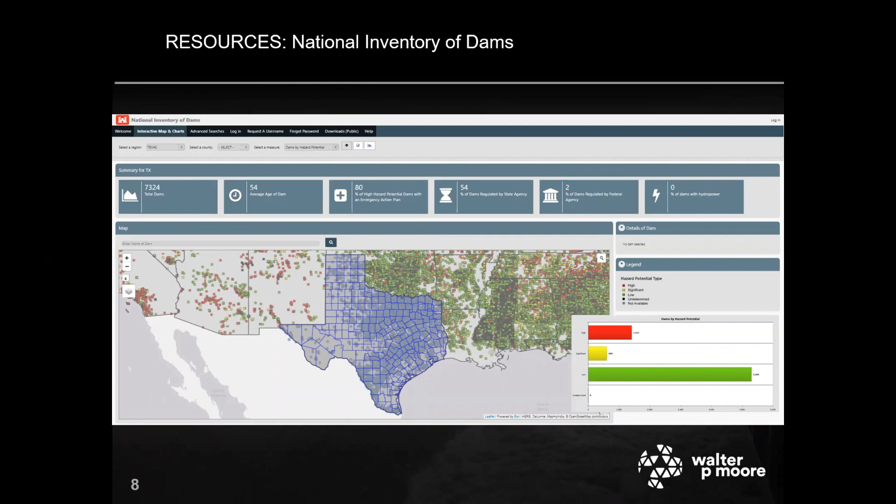Excuse me just a second. All right, sorry about that.

Let's look a little bit at the rating of the national infrastructure. This course that we started back in 2002, the 2-day course, was a result of ASCE's request for some seminars on failing infrastructure across the United States. One of the things that I have done over the years is to keep track of the ASCE report card since 1988.

So what you can see here are all the various different categories that we have for the national infrastructure, and the grades that have been given over the years for each category. As you can see, dams throughout the years have pretty much maintained a D average, which isn't good. So it became a concern for our staff here at Walter P. Moore to try and get that message out.

And so we got involved in providing these seminars across the United States to try and get engineers and perhaps, if we could, their clients, and then there were some people in the insurance industry to understand what the risks were related to dams.

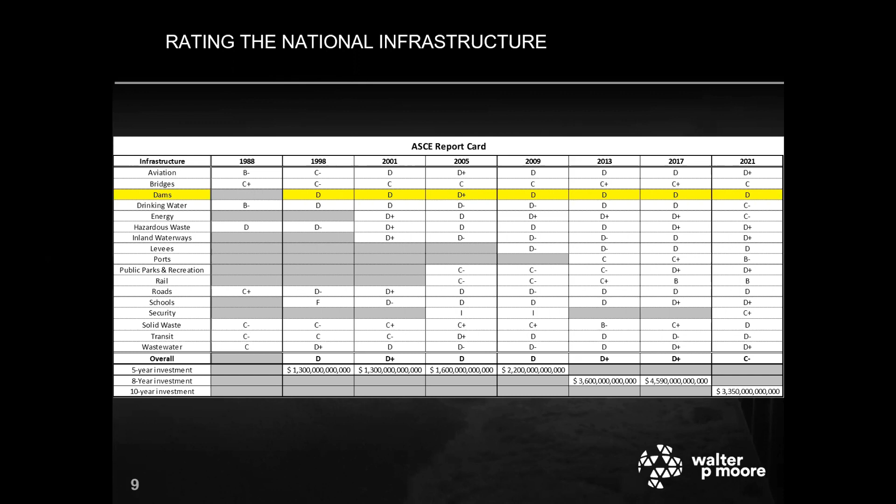So there are several issues that face dams. According to the Association of State Dam Safety Officials, the top issues facing the dam safety community are, first of all, the risk of failure. There are currently over 1,680 dams across the United States which are considered unsafe due to some significant deficiency, and these are located in nearly every state.

Next, there is the increasing hazard. A high hazard dam indicates that there would likely be loss of life or substantial damage to property in the downstream reaches in the event of a failure. There are currently over 15,000 high hazard dams in the United States, which is up from 9,900 in 2006.

The increasing number of high hazard dams is not due to an increase in the number of high hazard dams being built, but rather has to do with the increasing development downstream of existing dams. Texas and North Carolina, just those two states, account for over 1/6 of all the nation's high hazard dams.

I'm going to talk a little bit, just mention briefly the financing for maintenance, upgrade, and repair. 63% of all dams in the US are privately owned. So if you think about that, that's probably dams owned by farmers or by homeowners associations, and the financial resources of these private owners are somewhat limited for most of those dams.

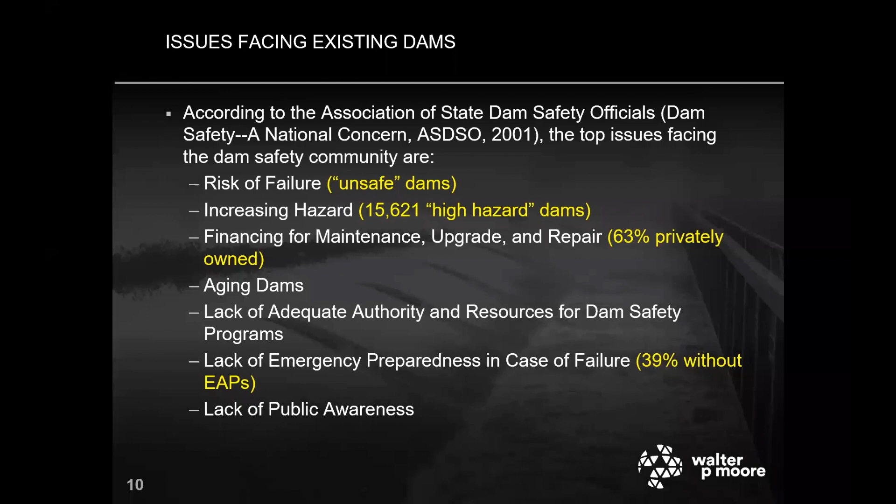So turning back a little bit just to the two categories that I skipped over, aging dams, just to give you an idea. As of 2018, some of the statistics were that many of the dams designed have an effective design life of about 50 years.

So I should say this NID statistic's been upgraded to 2020, but it's estimated that as of 2020, approximately 63% of all dams in the US were older than 50 years already. And by 2030, that number is going to jump to 81%.

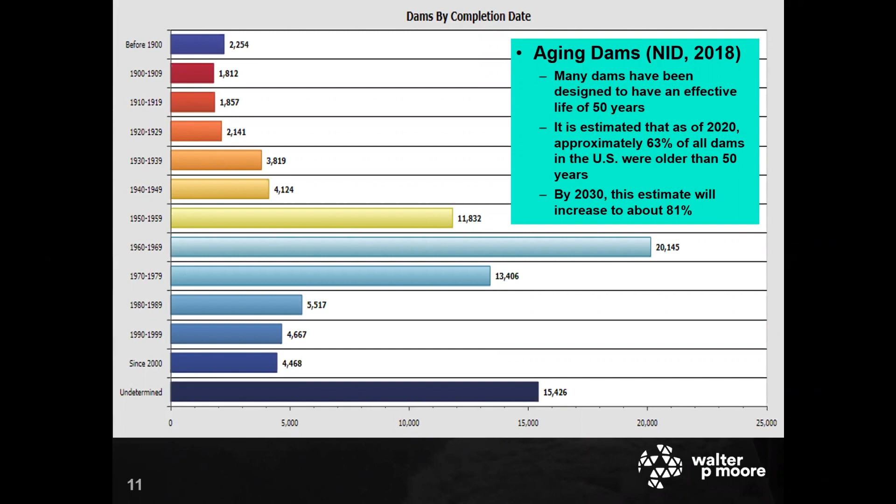And then finally, on that list of issues, if we look at the lack of adequate authority and resources, I'll just take Texas as an example. We see that we have over 7,000 dams in the state, of which 4,000 or so are regulated by TCEQ. There's 1,400 high hazard dams, and approximately 800 of those are deficient in some form or other.

The good news is that we're higher than the national average in terms of those high hazard dams that have an EAP, or emergency action plan, at 80%.

But what we find is that most states have legislative authority to carry out a dam safety program, but some states have limited ability to enforce the law, and officials have no recourse if a dam owner fails to respond to state-ordered repairs. On top of that, all but one state, that state being California, are underfunded and understaffed to administer a state's dam safety program effectively.

You can see here in Texas that we have a budget of roughly $417 per dam in the state, and that's just the ones that are regulated. We also have a number of dams that each full-time equivalent staff at TCEQ has responsibility for, which averages out to about 149. FEMA recommends that number come down to about 25 per full-time employee.

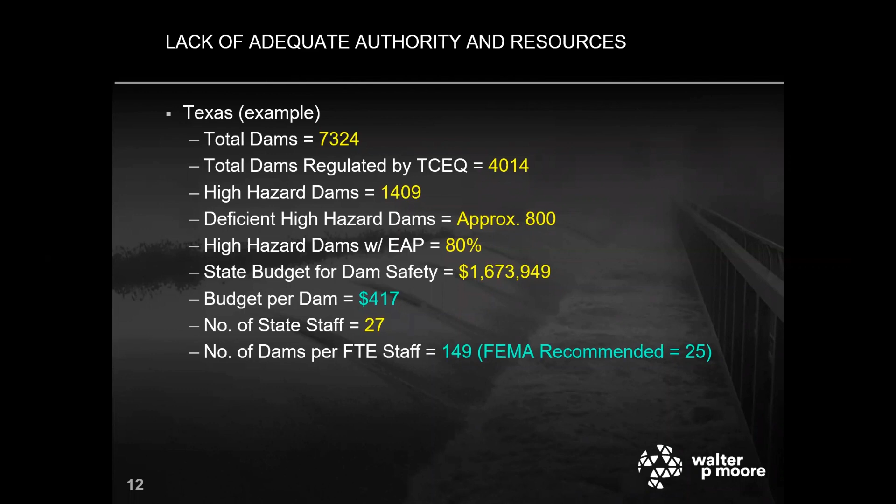One state, Alabama, has no budget for dam safety whatsoever. And so that gives you sort of the background of where we are in terms of that report card and the statistics that are following.

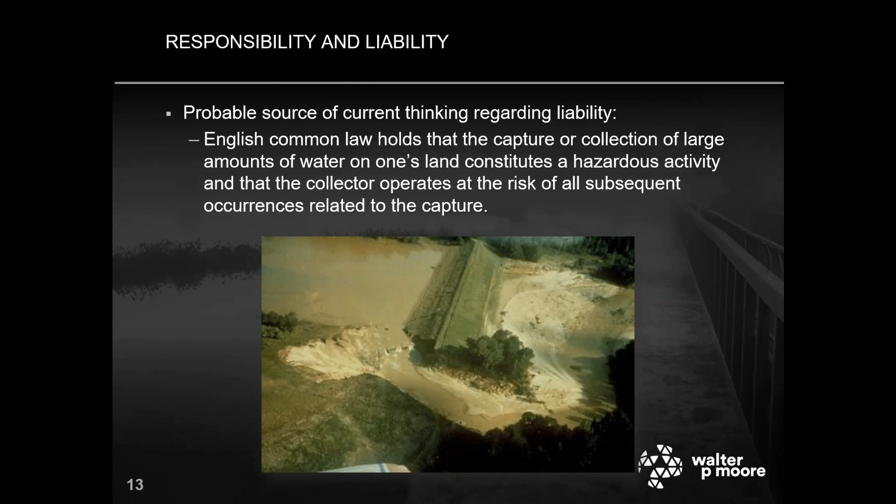So let's turn our eyes to responsibility and liability. The probable source of current thinking regarding the liability for dam safety is English common law, which holds that the capture or collection of large amounts of water on one's land constitutes a hazardous activity, and that the collector operates at the risk of all subsequent occurrences related to the capture.

This may come as a shock to some dam owners, such as homeowners associations, who probably inherit an amenity lake from a developer. While proper operation and maintenance may be only one aspect of the owner's activities, safely maintaining a dam is a key element in prevention of a failure and limiting the liability of the owner.

So when assessing liability, should a dam failure or an incident occur, the standard of care exercised by the owner is going to be closely examined. So ultimately, the responsibility for maintaining a safe dam rests with the owner.

I put this in here just because I think it reads really strangely. The National Dam Safety Program Act of 1996 reads: nothing in this act, or no action or failure to act under this act, shall create any liability in the United States or its officers or employees for the recovery of damages caused by such action or failure to act. And secondly, relieve an owner or operator of a dam of the legal responsibilities, legal duties, obligations, and liabilities incident to the ownership or operation of the dam.

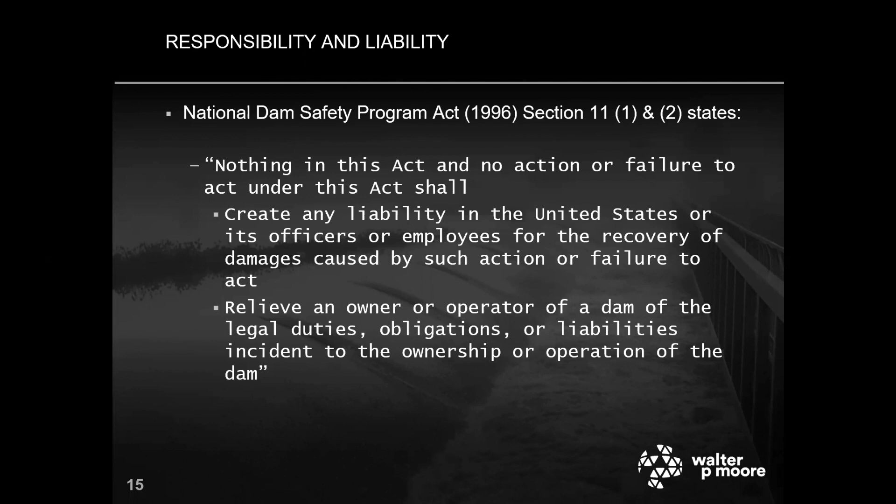So what is this saying? The federal government is basically saying that we're not responsible. So again, they're reinforcing this idea that the liability and responsibility comes back to the dam owner.

Well, is dam insurance something that an owner could acquire? Dam insurance is available for dams owned by state and local governments, and that is insured using the financial resources of the government itself. It's also available to privately owned dams.

Available for privately owned dams used for revenue generation, such as those for hydroelectric power. Owners and operators have resources to pay for insurance through revenue generation activities, but they also have an incentive to maintain coverage to protect their investment and to minimize business disruption losses.

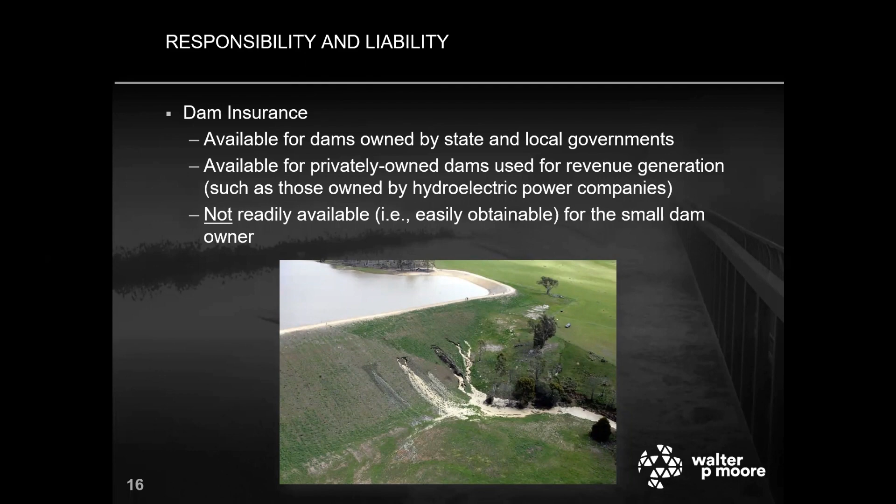But insurance is not available or readily attainable for the small dam owner. The primary barrier is the lack of credible probability assessments to determine the risk of loss. So insurers are reluctant to cover risks that cannot be assessed with a reasonable degree of predictability, and this leads insurers to base premiums on worst case scenarios, making insurance not affordable for the small dam owner.

So if you look at 1963 to 1972, there were several dam failures across the U.S., including the Baldwin Hills Dam in California and the Buffalo Creek Tailings Dam in West Virginia.

Then you have the executive order in 1979 that was preceded by 1976 and 1977, when there were several other very well-known failures, including the Teton Dam in Idaho and the Kelly Barnes Dam in Georgia. Then in 1994, we had 84 dams failing in Georgia, southwest Georgia, due to Tropical Storm Alberto. And then in 1996, we have the National Dam Safety Act. And then finally in 2001, we had 9/11, which resulted in the Dam Safety and Security Act.

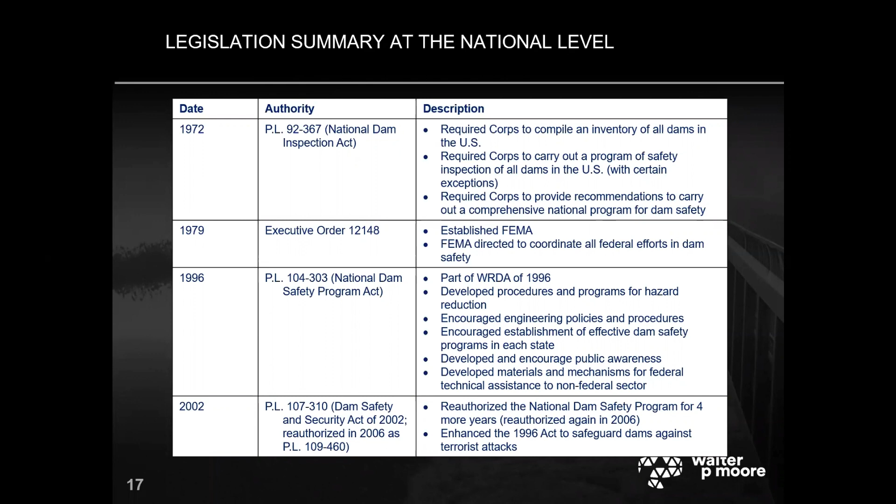Now, each one of those established different governing authorities with respect to dam safety. So we've got the implementation of a dam inspection requirement for the Corps of Engineers, and then the development of the inventory that we saw earlier. We have FEMA that is now coordinating federal efforts for dam safety. We've got the development of policies and procedures related to dams, and then finally enhancing the 1996 Act to safeguard against terrorist acts.

Now, in talking about regulations, dam safety regulations in Texas are governed by the Texas Administrative Code, Title 30, Part 1, Chapter 299. Now, these regulations will vary from state to state, and some of those acts that we looked at on the previous slide dictated that the state is responsible for setting up dam safety programs. And so while regulations are not the same from state to state, because there is no national regulation, FEMA's providing training, resources, and guidance. What you will see is there's some very similar aspects to all of the regulations from state to state.

And so Texas has its own, it's in Chapter 299. That's where you find really all of the details about the dam safety program there. The TCEQ also maintains an inventory of all dams in Texas that are currently under their jurisdiction. We noted earlier that there are 7,300 dams or so in Texas, but only 4,000 that fall under TCEQ regulations.

In 2011, legislation was enacted by the state that exempted a significant number of dams from TCEQ regulations. Basically, reservoirs that impound less than 500 acre feet and that are classified as a low or significant hazard, that are located in a county where there's less than 350,000 people, and they're located outside of the city limits of a municipality, are now exempt. So you meet those criteria, you're exempt.

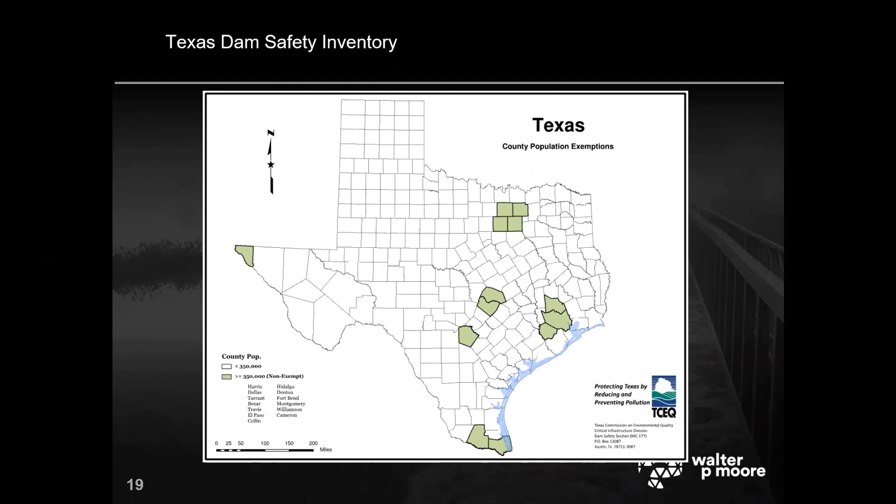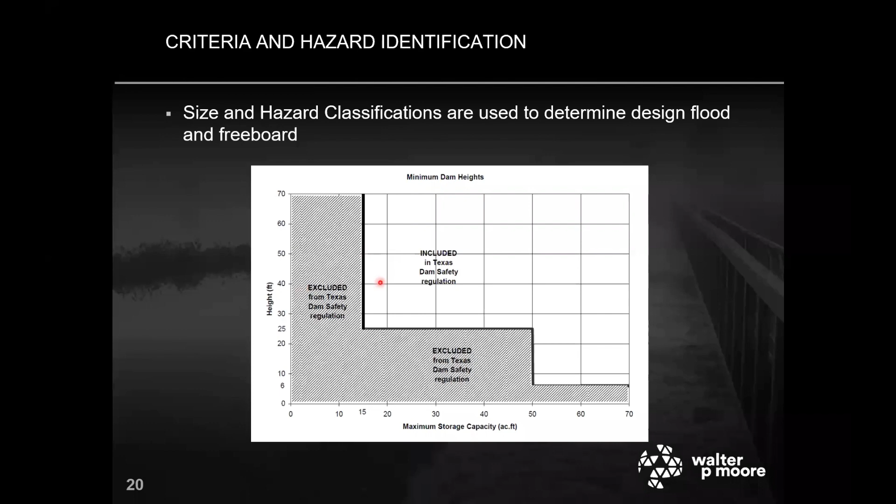There is criteria and hazard identification guidelines for the state of Texas, and all the states generally have this, perhaps with the exception of the one notable exception that I made earlier, where the state does not have any dam safety criteria. But criteria is based on size and hazard classification. These are used to determine the design flood and, in some cases, freeboard, depending on which state you're in. I should also say it identifies, you can see this gray hatched area - these are dams of this size which are excluded from Texas dam safety regulations. So this chart is really helpful in determining where we fall in terms of the regulations.

Now, if we talk about the classifications of dams, it falls under size classifications and hazard classifications. So typically in Texas, a large dam is considered one that is either greater than 50,000 acre feet of impoundment or greater than 100 feet in height. A small dam is less than 1,000 acre feet in storage, and less than 40 feet in height. And then an intermediate dam would be all those dams that are in between.

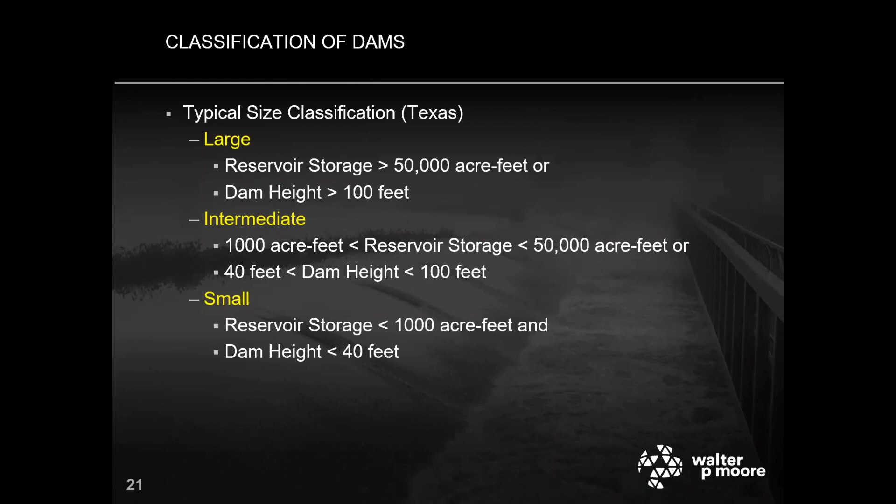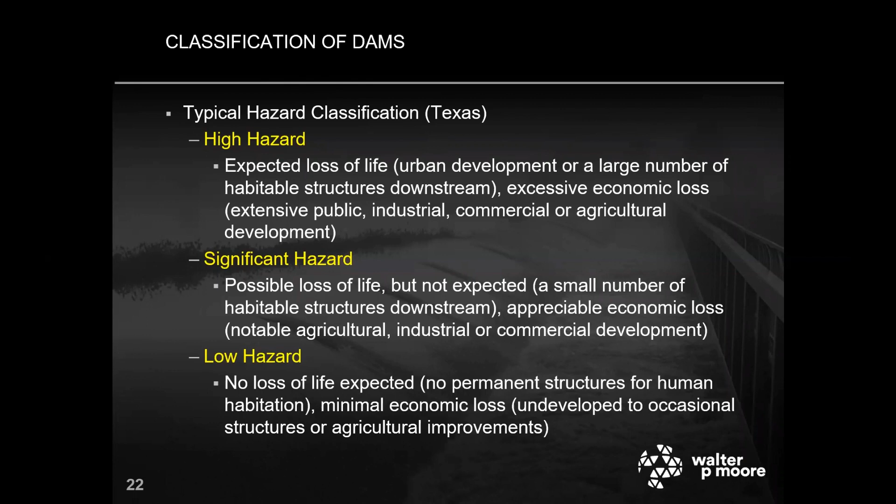Hazard classification - most people, when they hear high hazard dam, think that a dam is about to fail. That's not really what we're saying. What we're saying is if it were to fail, there would be expected loss of life and excessive economic loss. A significant hazard would really shift the gears to a possible loss of life, but not expected, and an appreciable economic loss. And then a low hazard means no loss of life expected and minimal economic losses. Sometimes the loss may only be the dam itself.

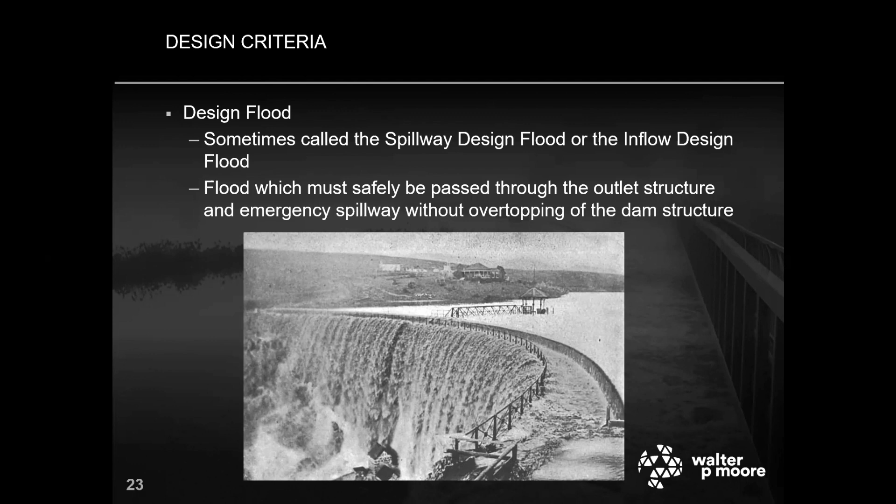These two factors figure into calculating what the design flood is going to be. The design flood, sometimes called the spillway design flood or the inflow design flood, is the flood which must be safely passed through the outlet structure and emergency spillway without overtopping the dam structure itself. In Texas, we have a table that sets apart the hazard classification and size classification so you can read off and determine the minimum design flood you'll have to pass.

There are a few exemptions. If you can show no adverse impact to downstream areas through a breach analysis, you may be able to pass a smaller storm. But more than likely, your spillway will have to be designed for one of these flood events. So if I had a significant hazard dam that was, say, 25 feet in height, which would be a small dam, I would have to pass 50% of the PMF, or the probable maximum flood.

Well, what is the probable maximum flood? That's the flood caused by a rainfall produced, in layman's terms, by the worst possible combination of climatic events. It works out to be about a rainfall event of 50 inches in 72 hours in the DFW area.

It's higher in the Houston area. Just to give you a relative understanding, Harvey reached about 95% of the associated probable maximum precipitation in the Clear Lake area. Beaumont was above 100%. So if you thought we can't reach 100% or a full probable maximum precipitation or probable maximum flood, we actually can. It looks like if Beaumont exceeded 100%, we might have to revisit those statistics in the near future.

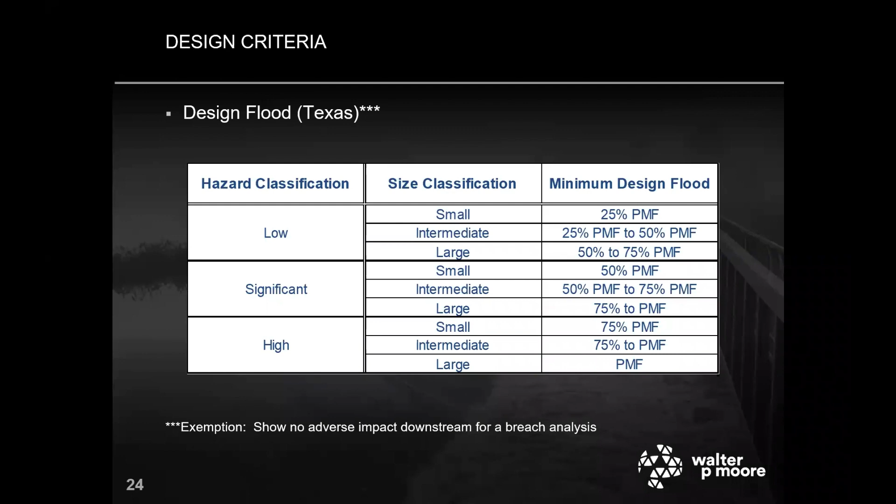But these are the magnitudes of events we're looking at. If you're trying to get a ballpark estimate, a PMF flood, a probable maximum flood, is roughly about 5 times a 100-year flood event. That'll give you a sort of a range of what we're talking about here.

I want to walk you through a real quick exercise that I normally do with my class. Looking at the statistics I have here on my slide, the description of the dam, I find I've got a 19-foot dam that can impound at its maximum elevation 939 acre feet. Because there's a county road bridge and a barn within 1 mile, it's probably classified as a small dam. It's in a rural area, so it would be a small dam with a low hazard classification.

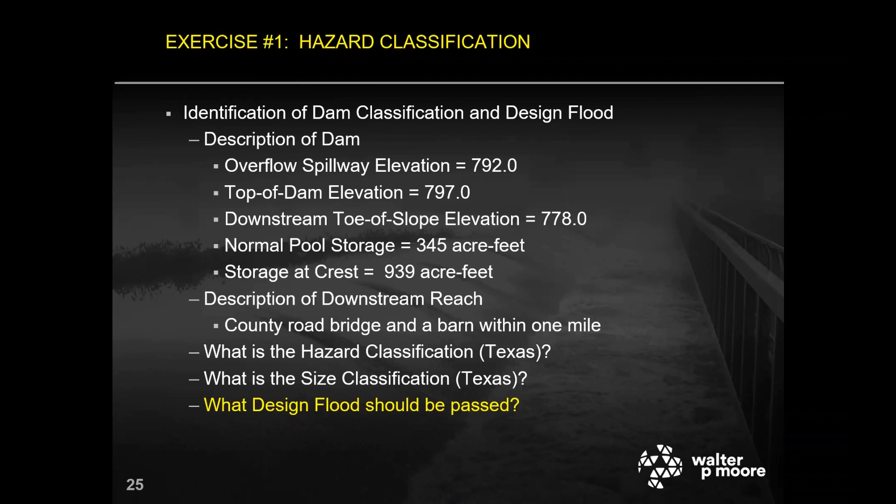Based on that table I showed you, that would turn out to be about a 25% probable maximum flood. Now here's the issue: a developer comes in and subdivides a 100-acre tract located downstream into 5-acre lots. 7 of these have a serene view overlooking a small stream, and the houses to be built are located at the outside edge of the regulatory 100-year floodplain, which has been significantly reduced as a result of the dam.

So the question becomes, what changes do I have to account for in terms of hazard classification, size classification, and the design flood I'm going to have to pass? If we look at it, the dam doesn't really change, so it's still classified as a small dam.

But what has happened is that the downstream condition has changed, and we have substantial residential areas that are now at risk, creating a high hazard classification. So that turns into going from a 25% probable maximum flood to 75% probable maximum flood. Now we've got 3 times as much flow that we're going to have to pass through our spillway. In a lot of cases, that can't happen.

So what do we do if the design flood can't be passed? The first thing we look at is the retrofit of the dam and spillway to make sure it can pass that. There is an alternative, an exemption I mentioned earlier, that you can perform a breach analysis to demonstrate there are no adverse impacts in order to qualify for an exemption. But that doesn't always happen, and so you're left with the idea that you may have to retrofit the dam and spillway, and in some cases, it may be more beneficial just to remove the dam altogether.

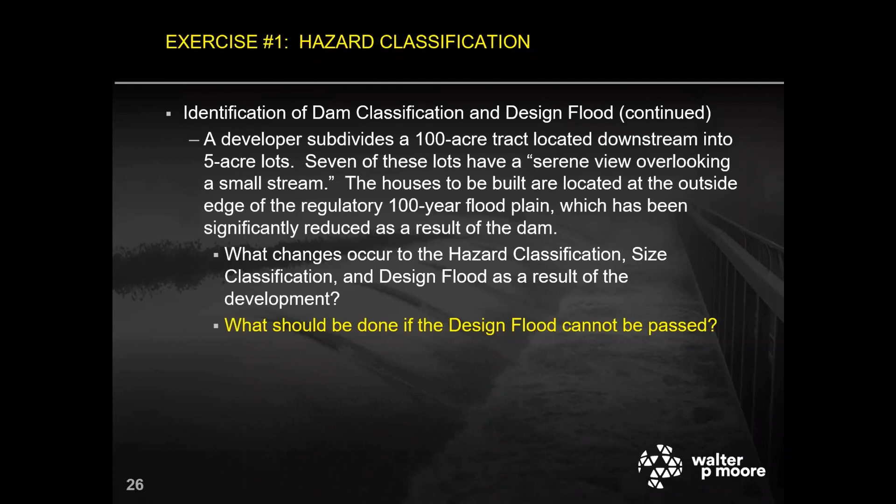With that background, let's talk about the issues we see out at dams when we do inspections, looking for deficiencies in the dam, looking for issues that may need to be maintained at a higher level so we don't lose the dam in the near future.

I'm going to walk through several inspection issues and how we might do an inspection. I've got several pictures for this exercise, because I think the best way to tell the story is with pictures. The things we're looking for are structural inspection issues, which deal with the integrity of the dam itself; geotechnical issues, which are primarily foundational and seepage issues; and finally the outlet works, which focus on the operational issues of the dam, both at low flow and at high flow conditions.

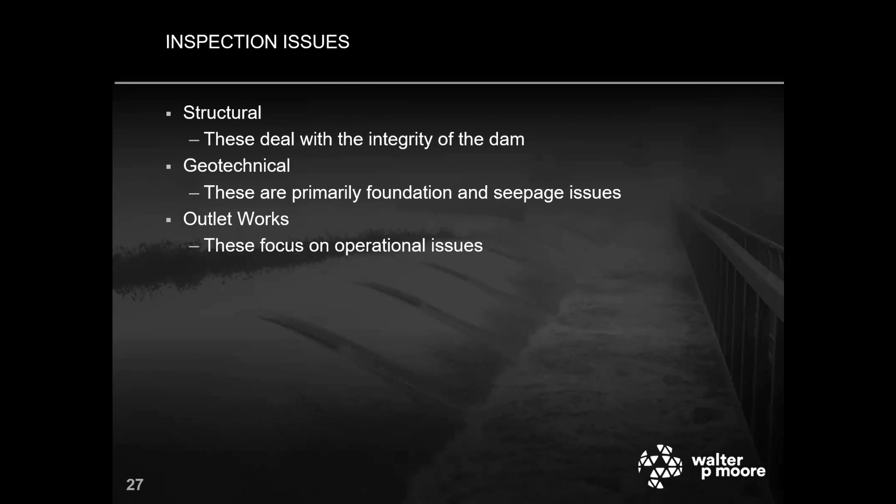So where do we begin? Part of the inspection process involves looking at records from previous inspections, or even just looking at where the dam is located and the condition of the surroundings it sits in. A lot of that can be done from a desktop, but we really have to get out there and walk the dam to figure out where the hidden issues are that we can't really see.

So the first thing we're going to want to do is walk the crest of the dam and look for things we might see out there. Are there longitudinal cracks in the dam? Are there transverse cracks due to erosion that could now allow water to pass over the top of the dam before it actually reaches the top? Are there depressions in the top of the dam? Things like that.

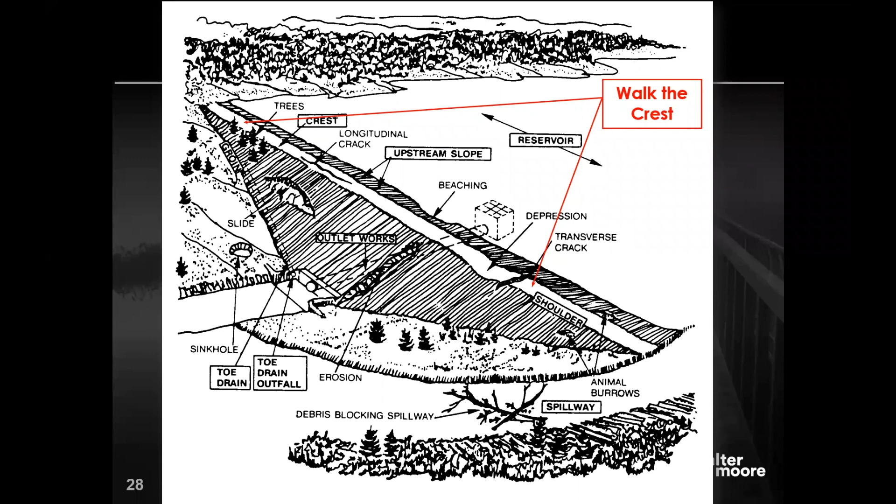If the dam is moving, that's something of consideration. Either way, we'd want to document this and provide it as a record of what may be happening. You may want to keep this under observation over the next couple of months and years, just to make sure it's not progressing further.

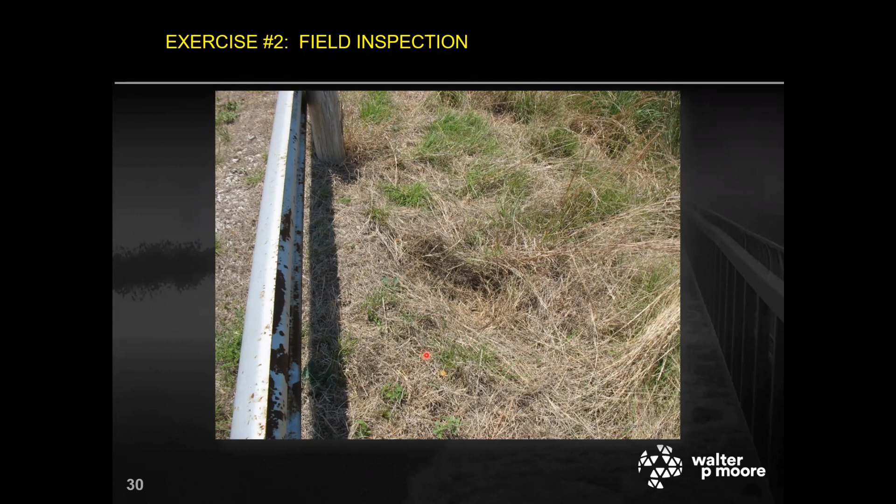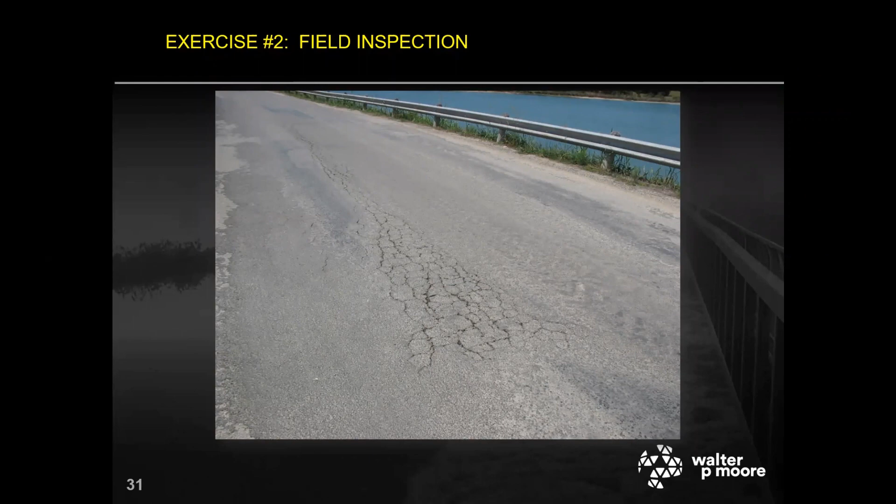These are all things that we would note as we're out there doing the inspection.

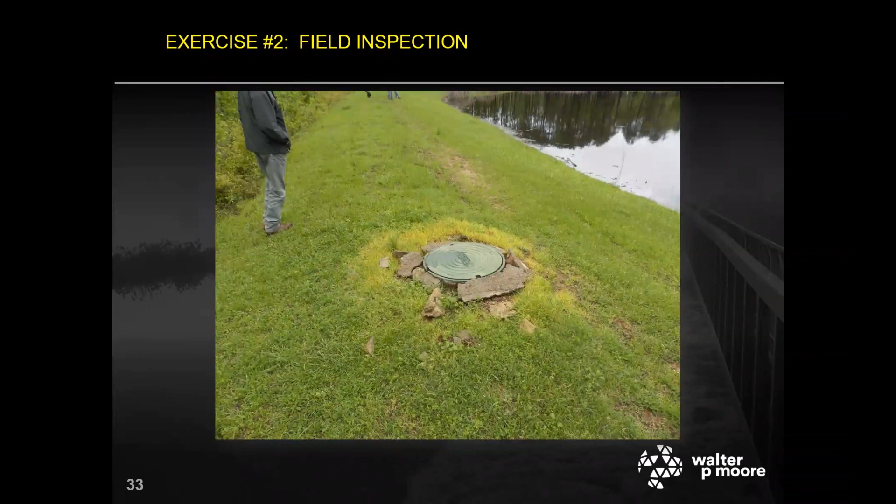This was kind of an interesting dam. We found a sanitary sewer running longitudinally along the dam axis, probably not the best place for utilities or sewer systems. It was running this direction all the way through the dam and across the spillway, a little bit downstream of the crest. So things to note that could potentially be risks to internal erosion, piping, or some sort of incident that could occur.

Next, as we continue the inspection, we want to look at the slopes and the toe of the dam. Some of the things that can occur include heavy vegetation, which can hinder the view of what's going on — maybe you have a slide or a slough in another place. So we want to pay close attention, walking back and forth across the slope of the dam to determine if there are any deficiencies there.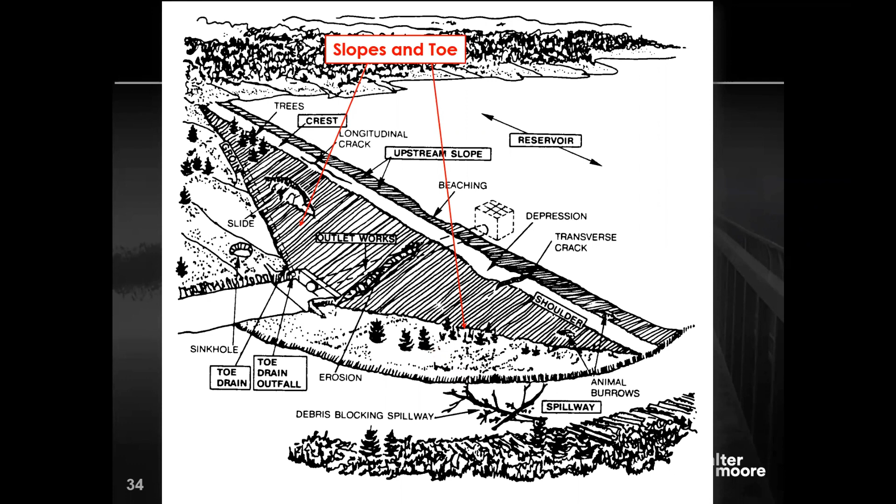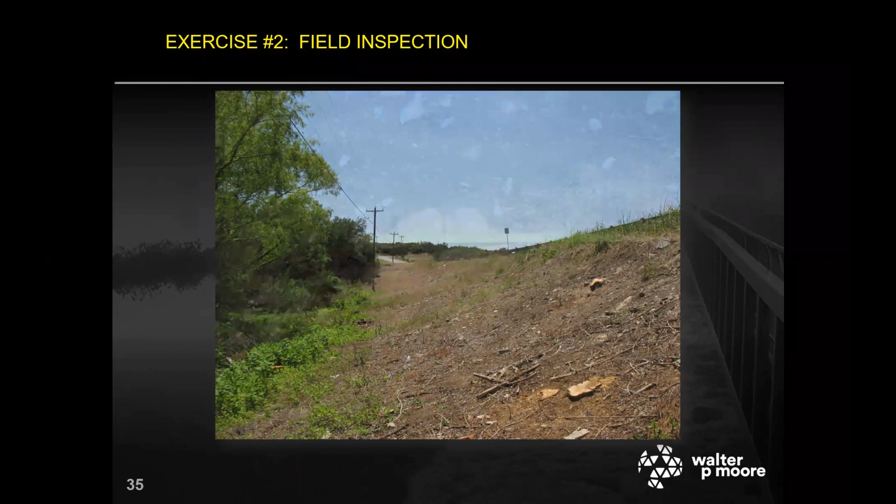This is that same dam with the road going across it. There is no vegetation on the downstream side of the dam, which is where we are. TCEQ had recommended the removal of trees from the dam, but what we see is the potential for erosion because there's absolutely no vegetation there now. When TCEQ made that request to remove all the trees, these were all juniper trees, and they were cut off at the base, so the stumps were left behind. This is usually not a good idea — tree roots are going to rot, creating the potential for piping along vacated tunnels in the dam. TCEQ did indicate that junipers won't rot that quickly, but there is a need for a long-term fix on this dam. So we recommended removal of the root balls and backfilling with good material. We got some information from the state of New Mexico on how best to treat this sort of situation.

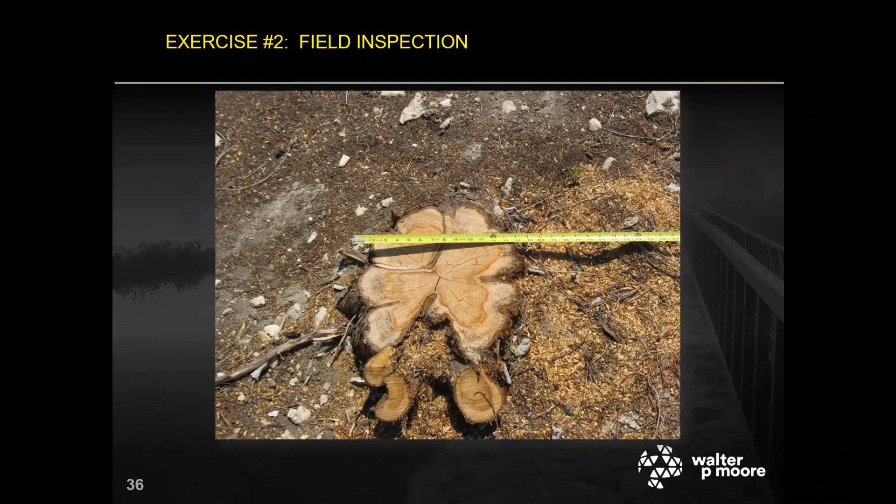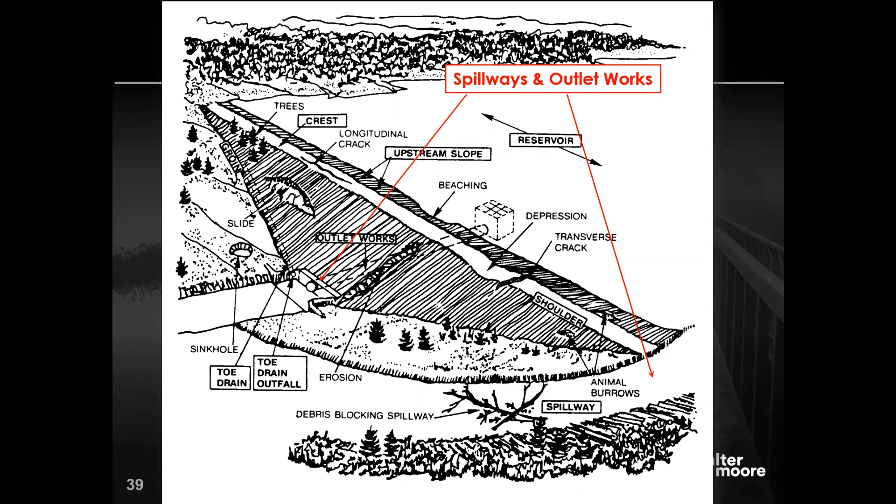Then we look at the spillway and outlet works. All of these are critical to the ability for water to pass not only the design storm, but the regular flows occurring within the dam. There are many different types of overflow structures or outlet works, so you have to keep in mind what you're looking at in terms of the structural ability and the hydrologic ability for it to pass the flow that it needs to.

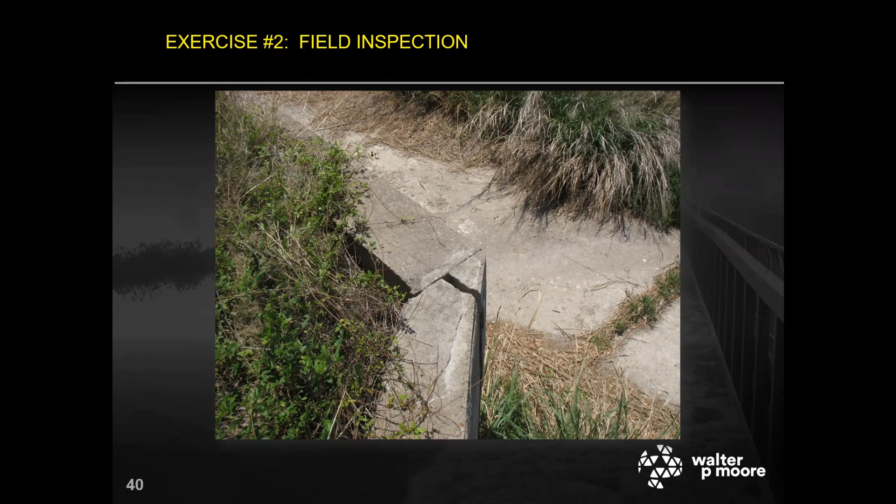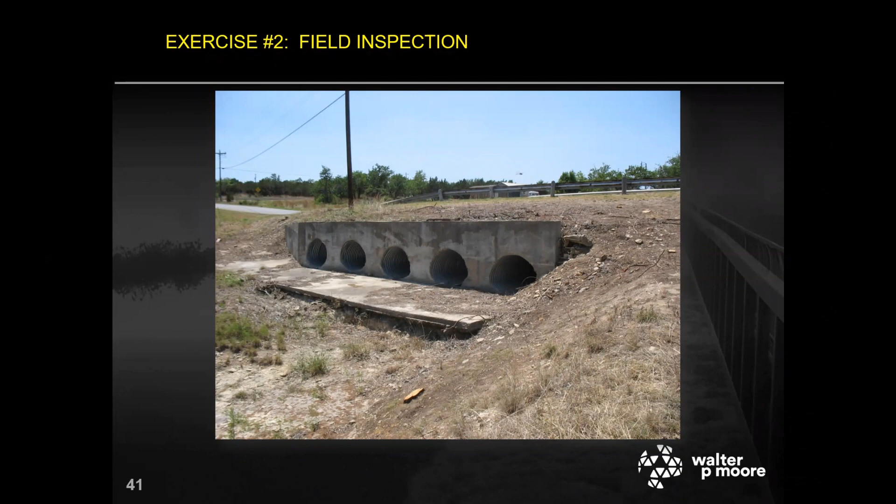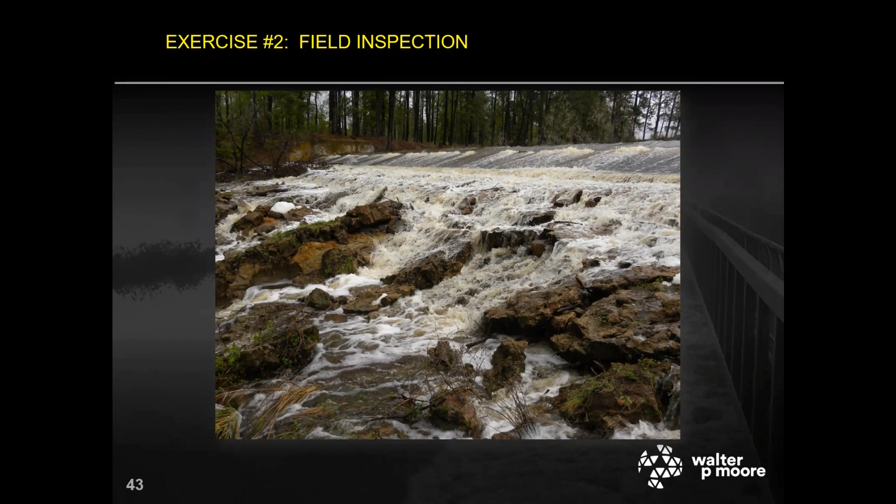This is what was called a rubble spillway. It was built by the Civilian Conservation Corps in the 1930s. It is, in this photograph, under flow from 7 inches of rain that occurred in about 12 hours the night before. Significant debris was in the spillway to the left of the photo, just off camera, you can't see it. But erosion was occurring due to the water from the storm. Haven't seen this much water in quite a while.

To describe the rubble spillway, it is sort of a series of cribs or cradles made of timber, that were then backfilled with cement, rock and mud. This dam, after this storm, went several years without a fix, primarily due to its placement on the historical registry. Once something gets on the historical registry, it's very difficult to get it restored back to working order. So anyway, just things to know about—this was an interesting spillway I had not seen before, and you're starting to see the erosion just from the massive amount of water coming over the spillway.

Looking next at the abutments of the dam, which is the area where the dam itself ties into natural ground. There is a potential for erosion that can occur in this area, what we call the groin, where the interface occurs. We also want to look for any kind of seepage that might show up as an improper contact or improper tie-in with the abutment.

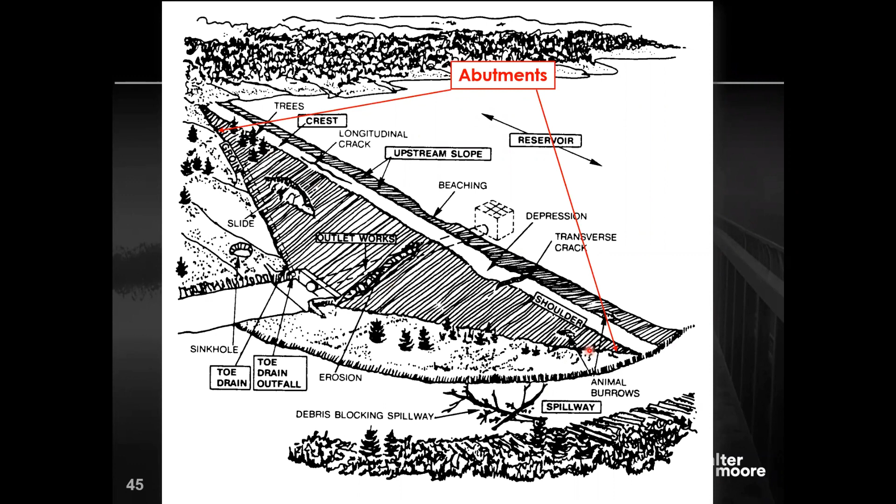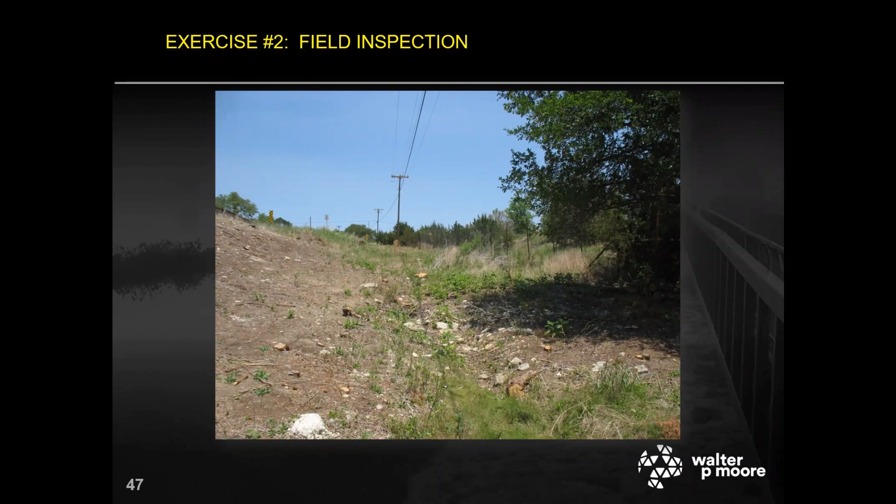What we see is another area where water is being channeled down the toe of the dam. There was an emergency spillway. I showed you the 5 or so pipes at the principal spillway—I think there were 48-inch arch pipes. The emergency spillway on this dam was only 2 18-inch CMPs, and they came underneath the road and were routed down the toe of the dam due to limited space. There's a wastewater settling basin on the right-hand side, so they had to make this immediate 90-degree turn and bring it down. Without the vegetation, there is the potential for more erosion to occur.

And then finally, looking at the downstream area, we want to look for areas of potential seepage, anything that might be telling us that water's not traveling in the direction we had intended it to go in its original design.

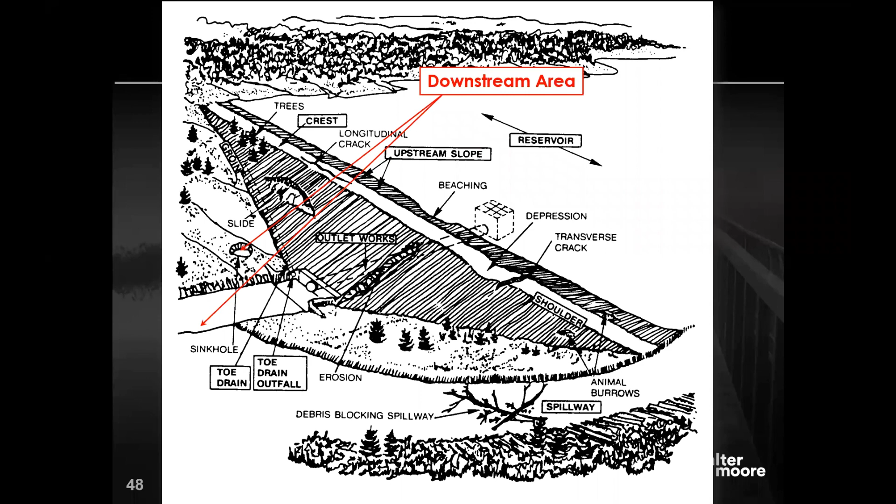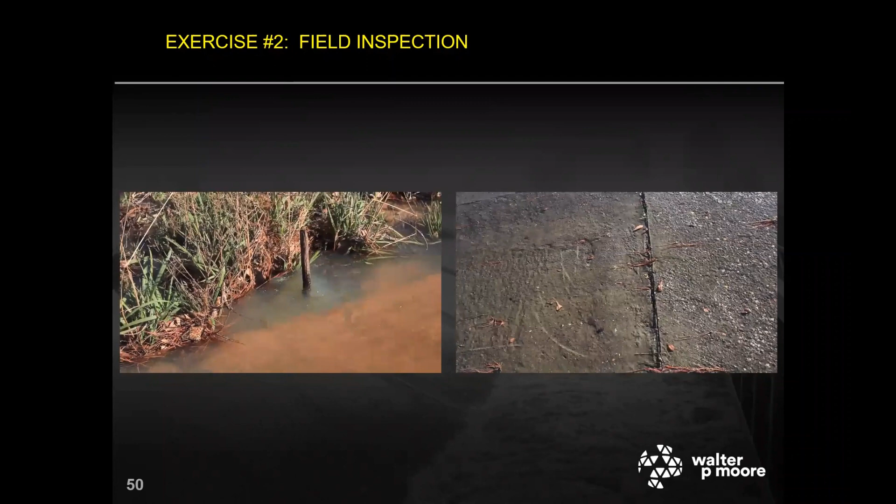This was a recent dam we were looking at. There was a boil or a spring at the toe of a chute spillway. The water was seeping into concrete joints. As you can see, it's coming down on the right-hand side and disappearing into these joints, then showing up on the downstream side, indicating there's a pathway underneath the slab of the spillway itself. This could become critical if left unmaintained or unrepaired.

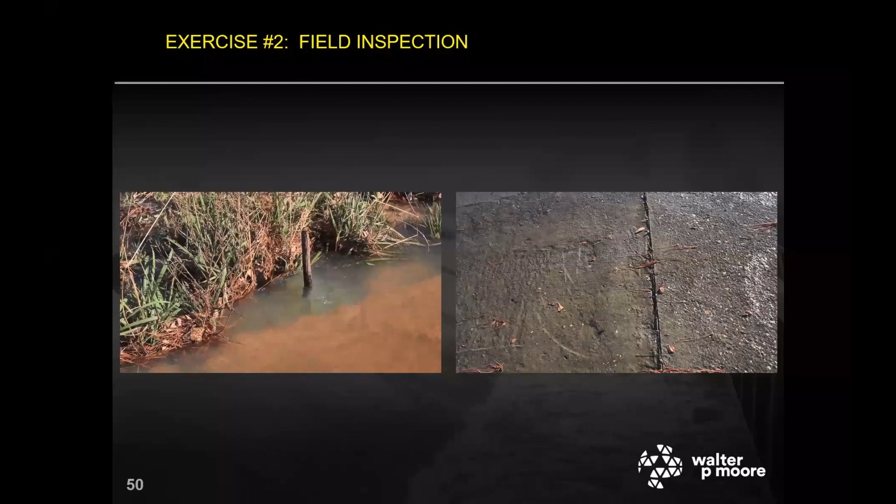So that generally covers the topics I wanted to talk about today, and it'll leave us about 10 minutes to discuss. Any questions y'all might have? Hopefully, as a result of the class, you can now identify who is liable for the safety of the dam - short answer, it's the owner. You can define a hazard classification of a dam; it really has to do with what's going on downstream in terms of development and risk to human life and property. And finally, to recognize the deficiencies and potential threats to dam safety.

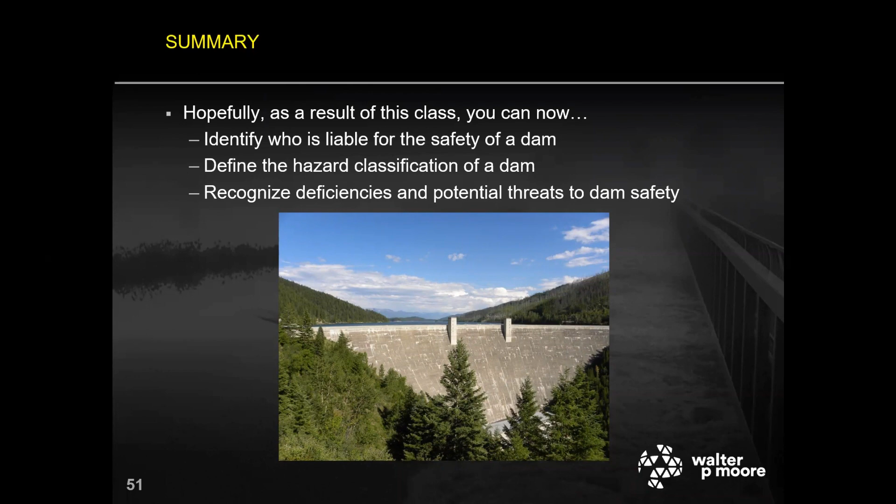So hopefully, looking through some of those photos in that exercise, you can come away with some of the potential problems that might exist at any given dam you walk out to. So with that, I will turn it back. I believe I'm turning it over to Mike for question and answer.